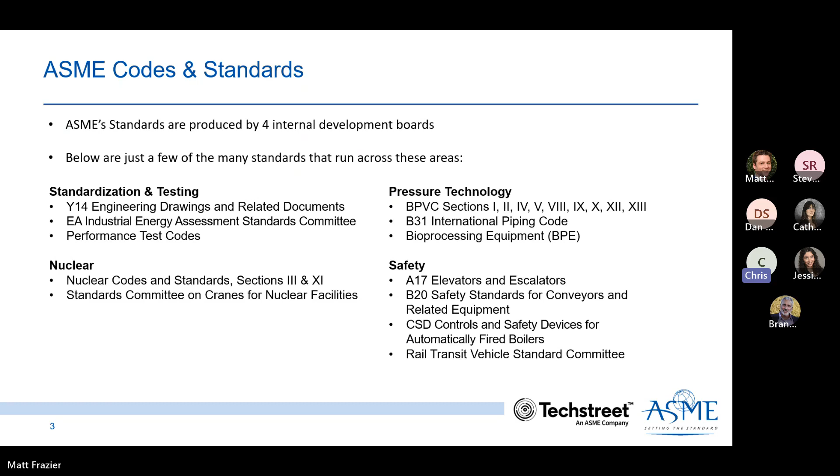Issued every 2 years, the Boiler and Pressure Vessel Code sets the standards for the safe design, manufacture, and maintenance of boilers and pressure vessels, power-producing machines, and nuclear power plant components. They also provide the latest information to maintain the ASME code symbol stamps. The next scheduled release of the Boiler Code is going to be July 2023. This edition is going to have 32 books with over 19,500 pages of material.

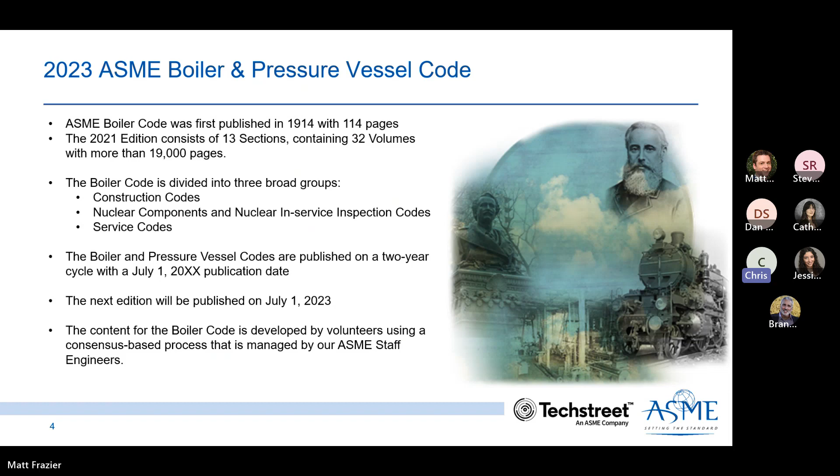The Boiler Code is a living document. It is constantly evolving. It is constantly providing essential rules and requirements for new materials, applications, and technologies, including material properties, as well as specifications for construction, safety rules and guidelines, proper care and maintenance requirements for pressure devices, as well as design and construction criteria across devices and components.

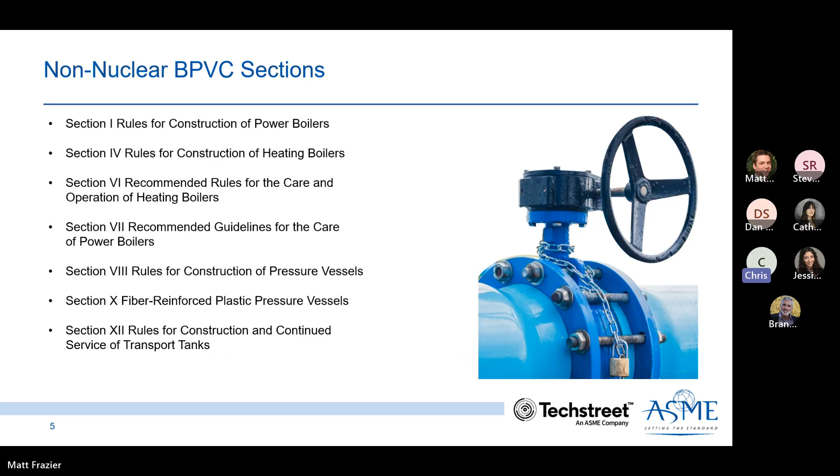Non-nuclear sections of the Boiler Code include construction of power and heating boilers, recommended guidelines and care for both, construction of pressure vessels, as well as working with reinforced plastic pressure vessels and transport tanks. The first part that we're going to cover is going to be the boiler sections.

For all types of power, electric, and miniature boilers, as well as high temperature water boilers, heat recovery steam generators, and specific fired pressure vessels to be used in stationary services, Section 1 specifies the construction requirements. It also covers power boilers used in locomotive, portable, and traction services. There are also guidelines for using the ASME certification marks. Those marks are going to be S, A, M, E, PP, and the PRT designator.

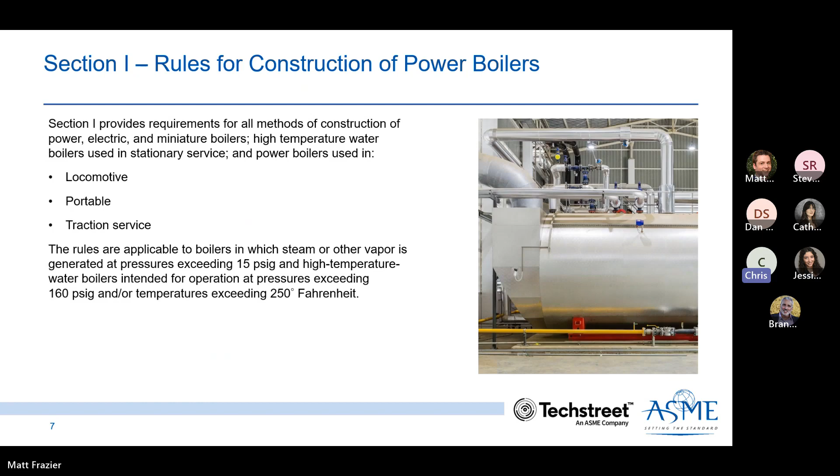Section 4 outlines the specifications for steam heating, hot water supply boilers, and potable water heaters intended for low pressure services that are directly fueled by gas, oil, electric, coal, or other solid or liquid fuels. These heaters must also meet standards for design, fabrication, installation, and inspection.

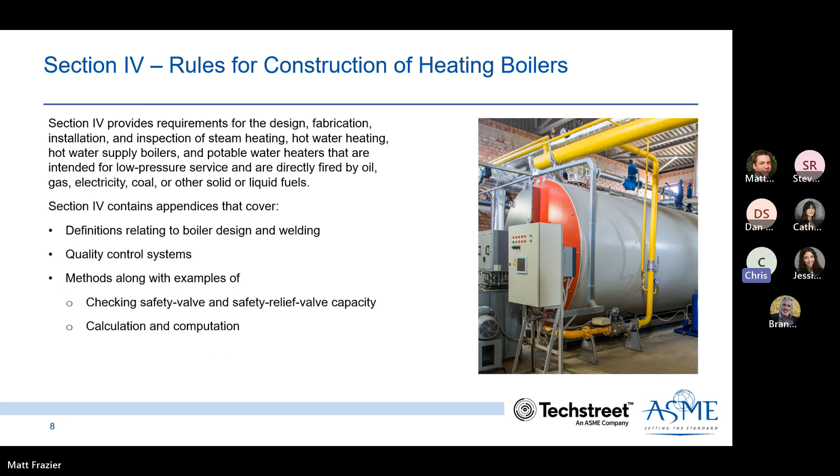It also includes appendices that define terms related to boiler design, welding, quality control systems, and methods of determining safety valve and safety relief valve capacities. Included in Section 4 are also going to be your guidelines for using H, HLW, and PRT product certification marks.

Section 6 covers the general descriptions, terminologies, and operation guidelines applicable to steel and cast iron boilers, limited to the operating ranges of Section 4 heating boilers. It includes guidelines for associated controls and automatic fuel burning equipment. Also included is a glossary of terms commonly associated with boilers, controls, and fuel burning equipment.

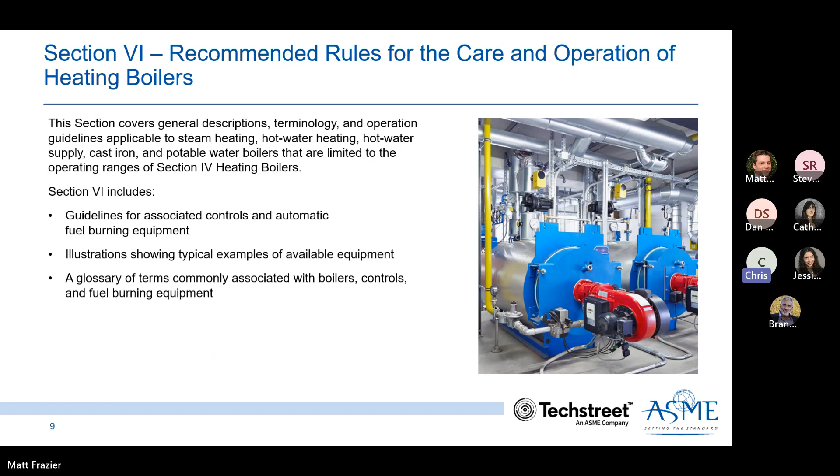Section 7 provides guidance and best practices for the use of power boilers in a safe manner. While locomotive and high temperature water boilers, nuclear power plant boilers, heating boilers, pressure vessels, and marine boilers are all excluded from the definition of a power boiler, it does cover stationary, portable, and traction type boilers. The instructions provided in Section 7 help individuals who are directly in charge of running, maintaining, and inspecting power boilers.

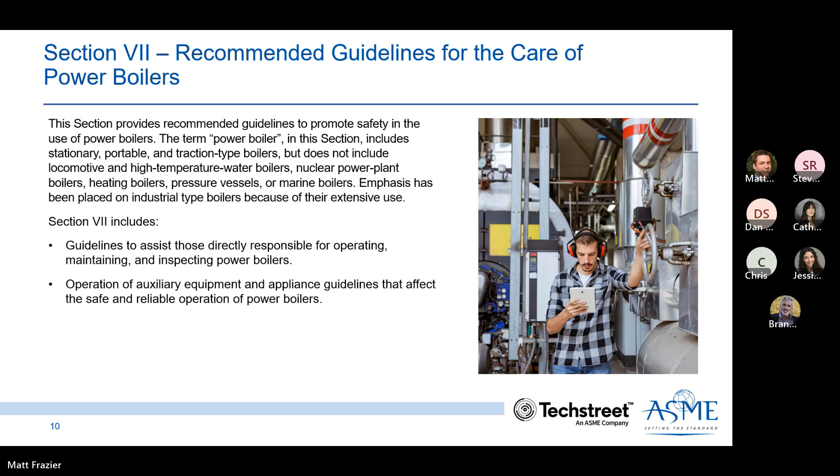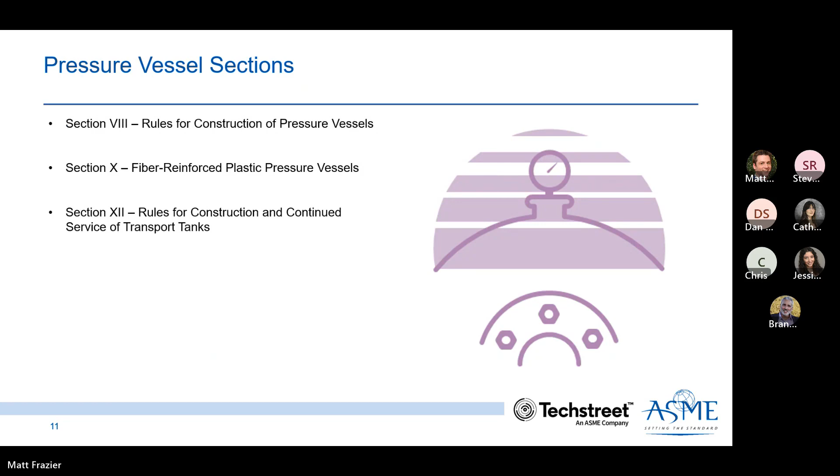The next non-nuclear section of the code is pressure vessels. Division 1 of Section 8 provides requirements applicable to the design, fabrication, inspection, testing, and certification of pressure vessels operating at either internal or external pressures exceeding 15 psi.

Specific requirements apply to several classes of material used in pressure vessel construction and to fabrication methods such as welding, forging, and brazing. It also contains mandatory and non-mandatory appendices detailing supplementary design criteria, non-destructive examination, and inspection acceptance criteria. Rules pertaining to the use of U, UM, and PRT certification marks are also included.

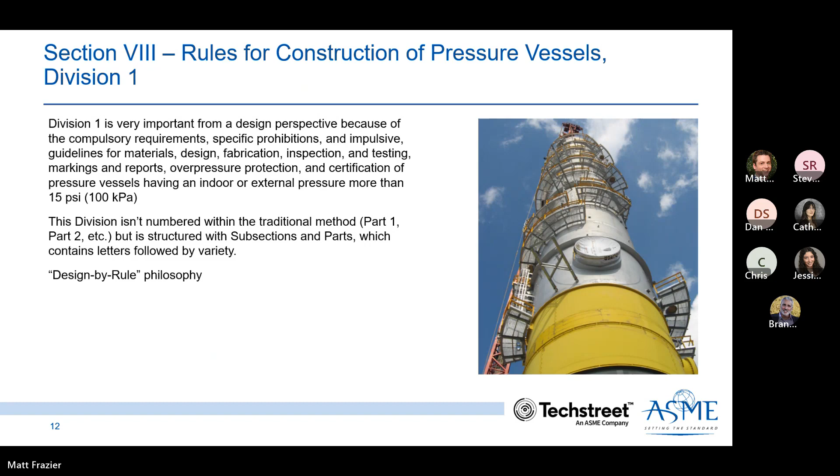Division 2 of Section 8 provides an alternative to minimum requirements for pressure vessels under Division 1 rules. In comparison to Division 1, Division 2 requirements on material, design, and non-destructive examination are more rigorous. Division 2 rules cover only vessels to be installed in a fixed location for a specific service, while operation and maintenance control is retained during the life of the vessel by the user who prepares the design and specification.

These rules may also apply to human occupancy pressure vessels typically found in the diving industry. Rules pertaining to the use of the U2 certification mark are included. There are specific differences between Division 1 and Division 2. Division 1 is concentrated on a design by rule approach, and Division 2 is design by analysis approach.

Division 1's design by rule approach is most utilized by engineers to size the pressure vessel according to the application's requirements. Division 1 is a much more conservative rule approach. The empirical relations and other mandatory and non-mandatory criteria often end up in an upscale pressure vessel design.

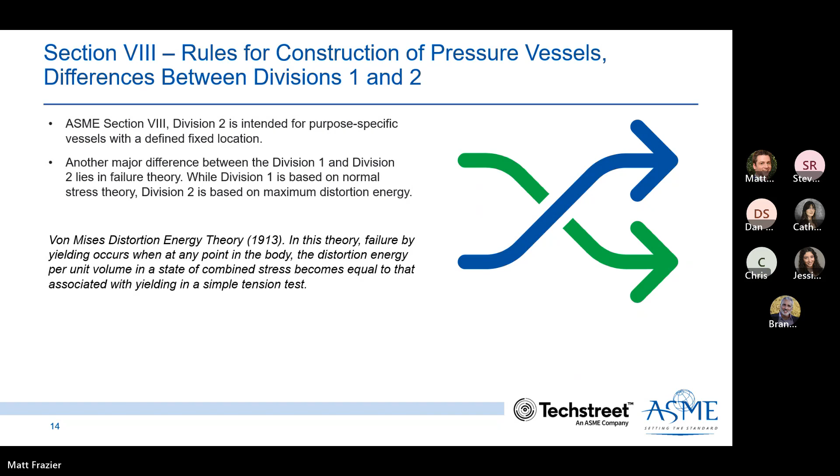Division 2, design by analysis approach, requires more detailed calculation than Division 1. Although this may increase the value of the pressure vessel design, it allows pressure vessels to face up to higher stresses. It's also meant for purpose-specific vessels with an defined fixed location. Another major difference between 1 and 2 lies in the failure theory. Division 1 is predicated on normal stress theory, and Division 2 is predicated on maximum distortion energy.

Division 3 of Section 8 provides rules for pressure vessels that operate at pressures exceeding 10,000 psi. Division 3 does not establish maximum pressure limits for either Section 8, Division 1 or 2, nor does it establish a minimum pressure limit for itself. Division 3 provides the rules that dictate the use of the ASME certification mark, the U3 designator.

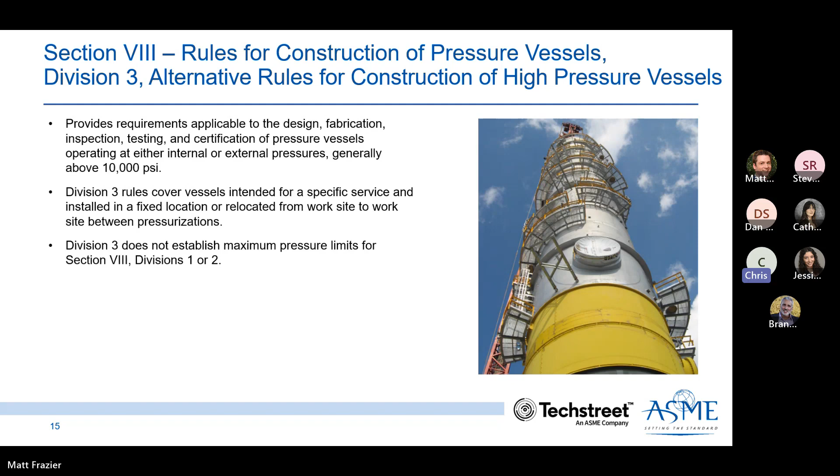Section 10 provides requirements for construction of an FRP pressure vessel in conformance with the manufacturer's design report. Section 10 covers requirements needed to produce, process, fabricate, examine, and test methods for the vessel. 3 classes of vessel designs are covered in this section. Classes 1 and 3 are qualified by destructive testing of a prototype, and Class 2 is subject to required design guidelines and acceptance testing using non-destructive techniques.

These vessels are not designed for lethal fluids. The only allowable techniques that can be used to fabricate vessels under Section 10 are bag molding, centrifugal casting, filament winding, and contact molding. There are also guidelines for using the RP certification mark.

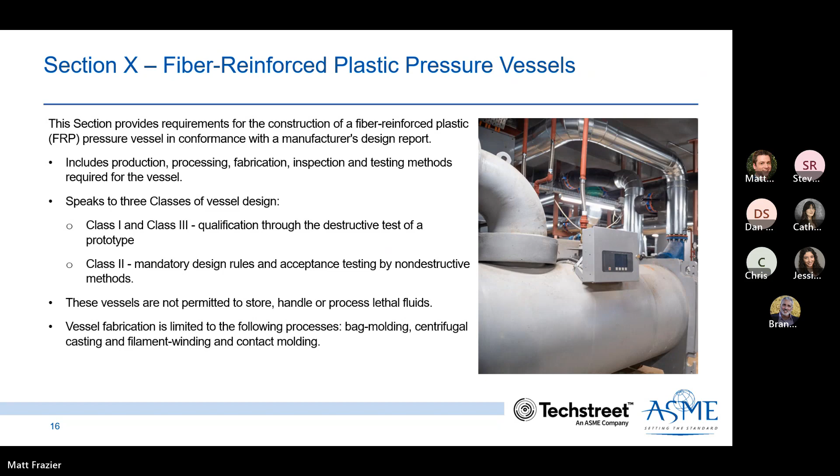The rules of Section 12 constitute requirements for construction and continued service of pressure vessels for transportation of dangerous goods. This can be via highway, rail, air, or water. Construction, material, design, fabrication, examination, inspection, testing, certification, and overpressure protection are also addressed.

Continued service is addressed, referring to inspection, testing, repair, alteration, and recertification of a transport tank that's already previously been in service. Included are also rules pertaining to the T and PRT certification product mark. The next sections we're covering are the nuclear sections, Section 3 and Section 11.

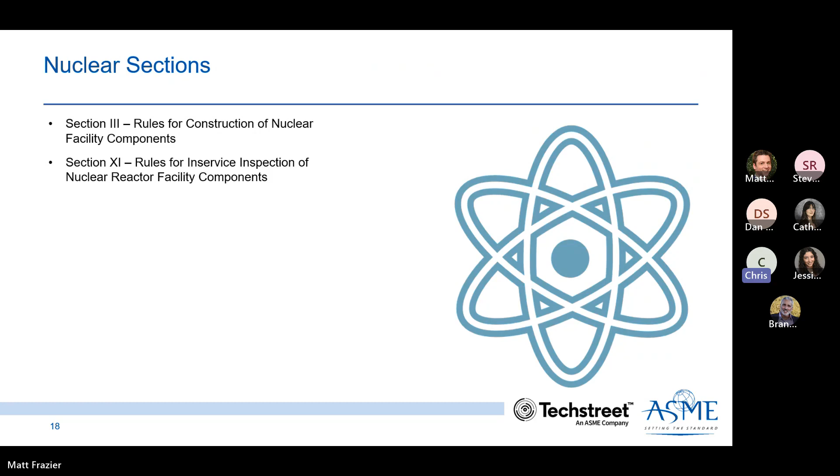Section 3 covers construction of nuclear facility components. The scope is intended to cover construction of components for all types of nuclear power plants. Division 1 covers your metallic vessels, heat exchangers, storage tanks, piping systems, pumps, valves, core support structures, supports, and similar items. It also provides rules for the low temperature light water reactors.

Division 2 contains requirements for material, design, construction, fabrication, testing, examination, and overpressure protection of concrete containment structures. These structures can be pre-stressed or reinforced. Division 3 contains requirements for the design and construction of containment systems for nuclear spent fuel.

Division 4 is fusion energy devices. This is currently a placeholder for future content. The upcoming Boiler Code 2023 will incorporate the components of FE1-2018 Rules for Construction of Fusion Energy Devices. And finally, Division 5, High Temperature Reactors, provides suitable rules for construction of gas and liquid cooled reactors.

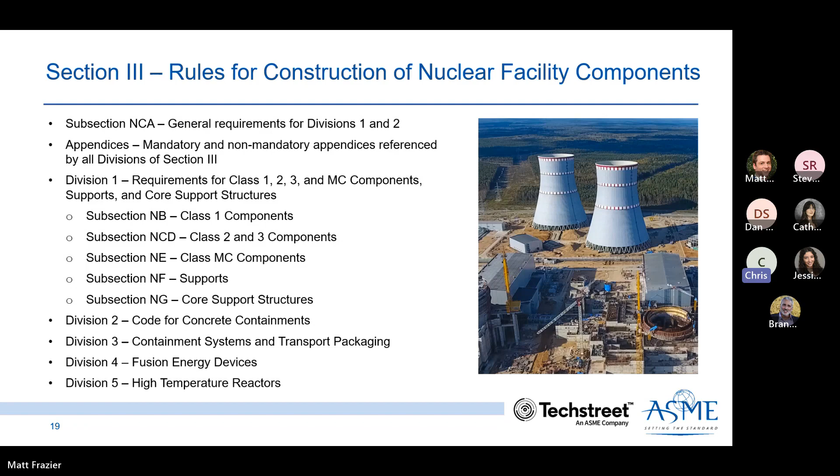Section 11 constitutes requirements to maintain the power plant while in operation and return the plant to service following plant outages, repair, or replacement activities. Division 1 is inspection and testing of components of light water cooled plants. And Division 2 is reliability integrity management. The first edition was published in 2019 and it includes a methodology to establish in-service inspection criteria independent of an SMR's technology. Division 2 is technology neutral and is applicable to all reactor designs.

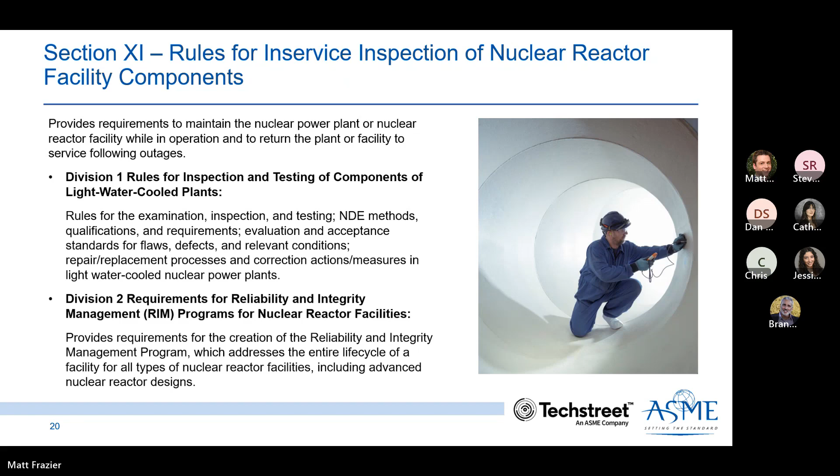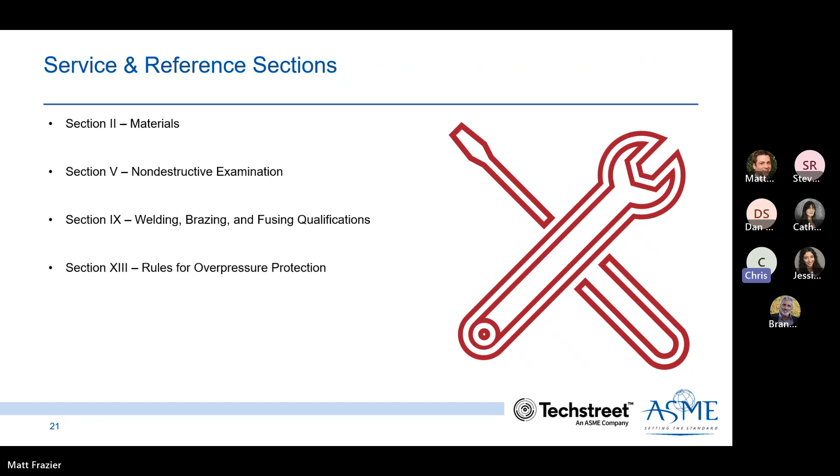The final section of the code are our service sections, and we'll cover them starting with Section 2. Starting with Section 2 of the service section, materials. Materials are broken into 4 parts. Part A is ferrous material. Part B is non-ferrous material specifications. Part C is specification for welding rods, electrodes, and filler metals. And we have Part D properties, which are customary or metric. It provides tables for the design stress values, tensile and yield stress values, as well as tables for material properties.

Moving on to Section 5 of the service section. Section 5 contains requirements and methods for non-destructive examination, which are referenced and required in other code sections. It also includes manufacturer's examination responsibility, duties of authorized inspectors, and requirements for qualification of personnel, inspection, and examination.

Section 9 contains the rules related to qualification of welding, brazing, and fusing procedures as required by other code sections for component manufacturers. It also covers rules related to the qualification and requalifications of welders, brazers, and welding, brazing, and fusing machine operators as required by other code sections.

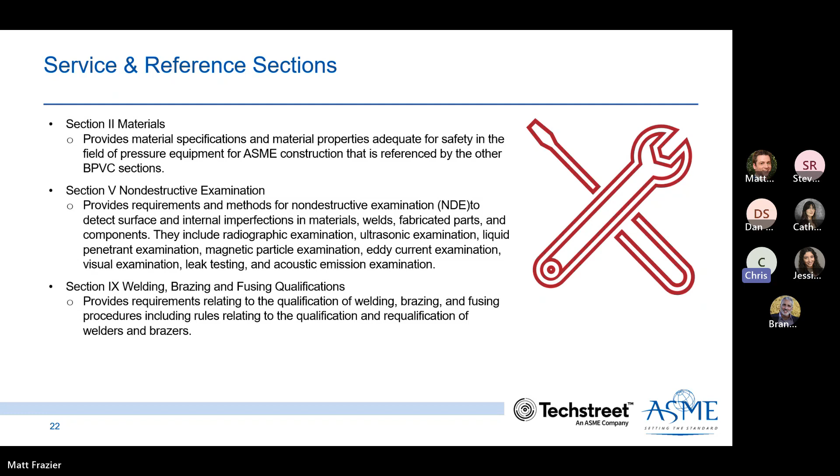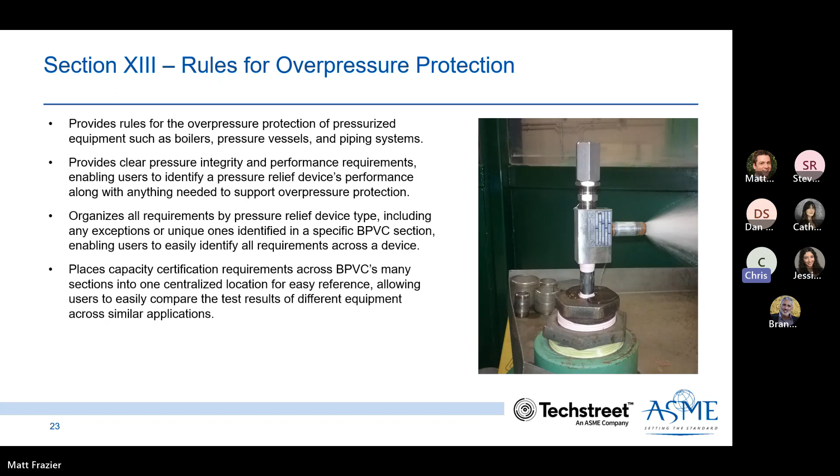And finally, Section 13. Section 13 was originally released in 2021. This is a newer section. It provides rules for overpressure protection, pressurized equipment such as boilers, pressure vessels, and piping systems. One of the main benefits of Section 13 is that it is organizing all requirements by pressure relief device types, including any exceptions or unique ones that are identified in a specific boiler code section, which enables users to easily identify all requirements across a device. In addition, Section 13 places capacity certification requirements across the code's many sections into one centralized location.

Errata to the boiler code may be posted on the ASME website to provide corrections to incorrectly published items or to correct typographical or grammatical errors in the boiler code. Erratas are announced through postings on the ASME website immediately after receiving approval from the respective code section committees. To gain access to the postings of these erratas through the boiler pressure vessel resource page, that can be found at www.asme.org. In addition, you can also subscribe to notifications for erratas for each and every ASME boiler pressure vessel code section.

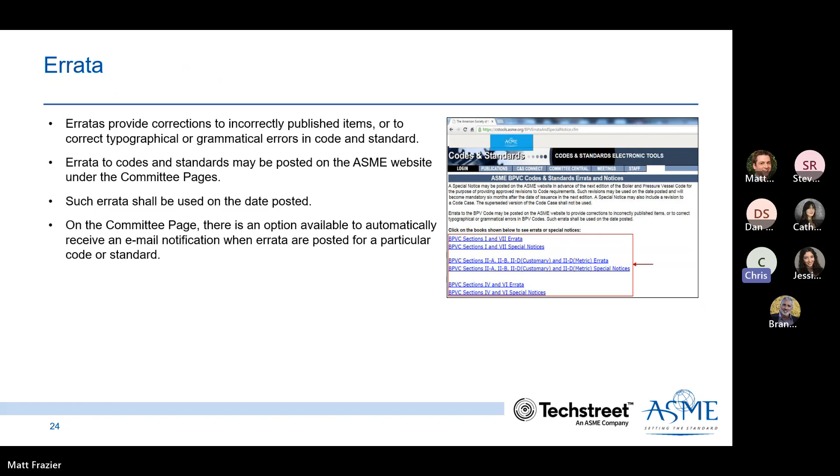In the event of an urgent need for alternate rules concerning materials, constructions, or in-service inspection activities not covered by existing boiler pressure vessel code rules, or the need for early implementation of an approved code revision, ASME may issue a code case. Code cases are effective immediately upon ASME approval. Code cases do not expire. Code cases are published in two categories. They're either published in boiler pressure vessel or nuclear. Purchases of either compilations of approved code cases include a subscription to the corresponding supplements contained in new and revised code cases issued during the associated 2-year edition cycle.

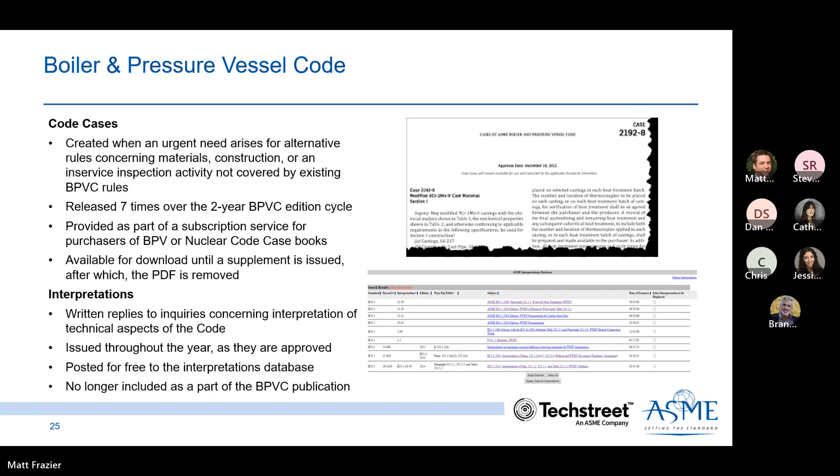For an organization to be recognized as ASME certified, your company is going to go through a rigorous process to ensure every operation is compliant with the code and performed to the highest standard. Typically, the time for a company to be certified from the time they submit an application to the time they receive certification is approximately 6 months.

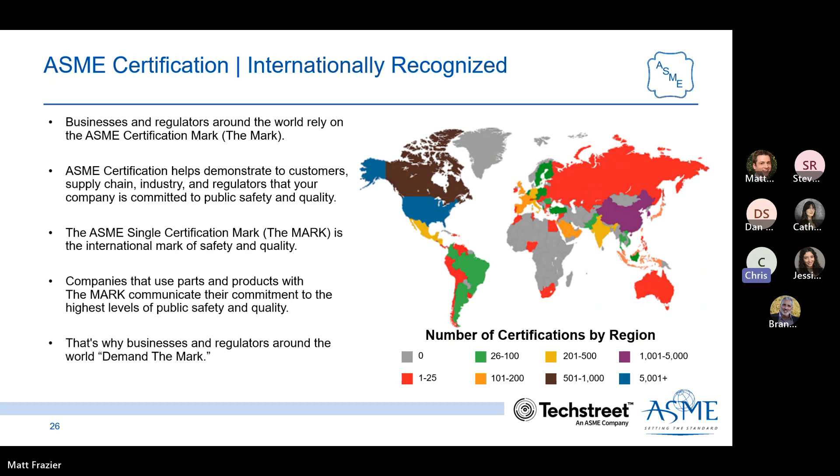The ASME certification mark covers nuclear and non-nuclear products and services which fall under the following categories. We have the boiler designators. We have 6 for power boilers under Section 1, 3 programs for heating boilers under Section 4. We have 5 certification programs for pressure vessels, 3 under Section 8, Division 1, 1 under Section 8, Division 2, and 1 under Section 8, Division 3.

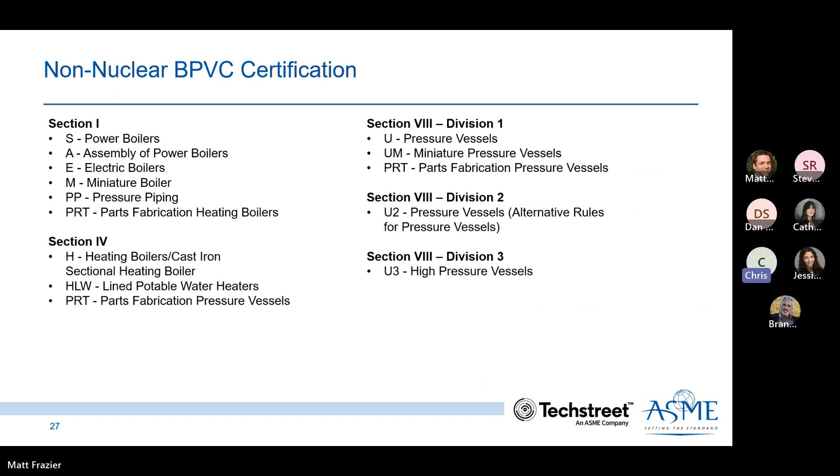Continuing with the non-nuclear boiler code certifications. We have 1 pressure vessel designator under Section 10, reinforced plastic vessels. For transport tanks, we have 2 designators under Section 12. And under our newest section, Section 13, there are 8 designators for certification.

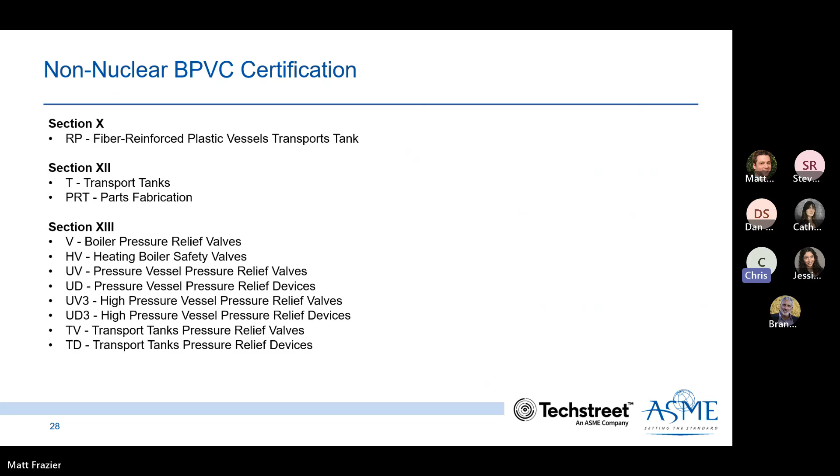ASME's nuclear certification programs consist of 6 different N-type designators, as well as an owner certification. N-type certificates of authorization issued by ASME signify that the certificate holder has been through a rigorous survey to verify the adequacy and the effective implementation of their quality program. If you do have an N stamp, it allows you to put that mark on the parts, components, and appurtenances used in nuclear facilities under Section 3 of the Boiler Code.

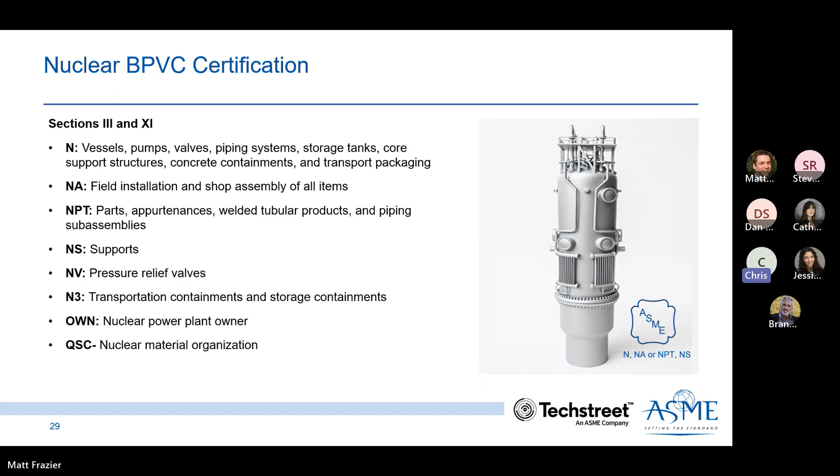One nuclear program that doesn't have a stamp is QSC, or the Nuclear Material Organization Certification Program. This program certifies organizations that are providing material to nuclear power plants in accordance with the requirements of Section 3, NCA 3800 and NCA 3900.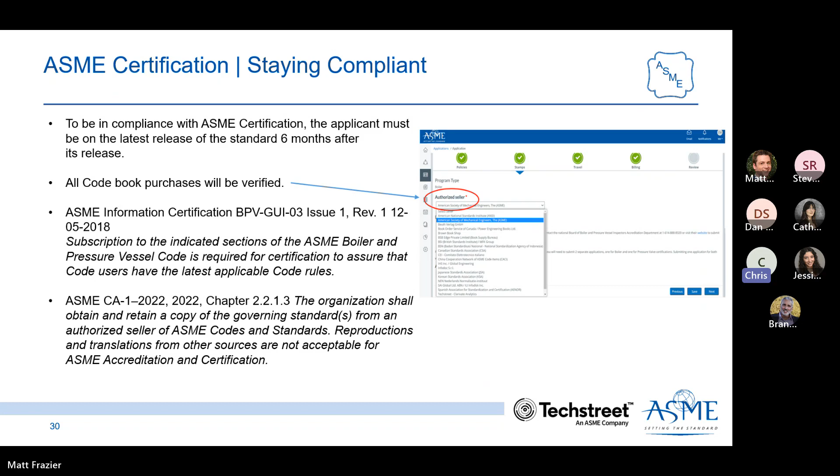It is a requirement for all ASME certificate holders to be on the latest edition of the Boiler and Pressure Vessel Code within 6 months of its release. That's why if you are carrying a code stamp, if the code comes out on July 1st, you must be in compliance by January 1st. All code books are verified that they have been purchased through an authorized reseller, such as Techstreet, and the organization is required to designate who they purchased their code book from during the application process when you are in CA Connect. This is just an example of the code books that would be necessary for an organization undergoing certification for a U or a UM certificate.

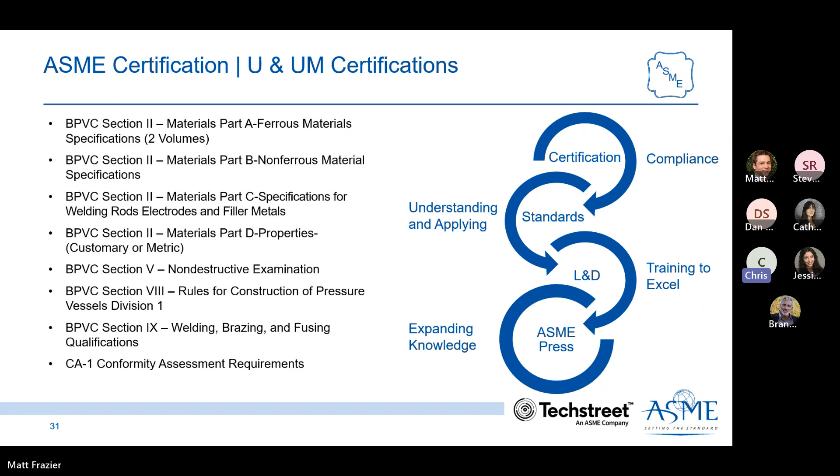And finally, we have a robust website. You can download all the information related to codes and standards and certification, as well as finding who your authorized resellers are and the books that you need for your certification program, or any related ancillary documents that are relevant to standards or your program.

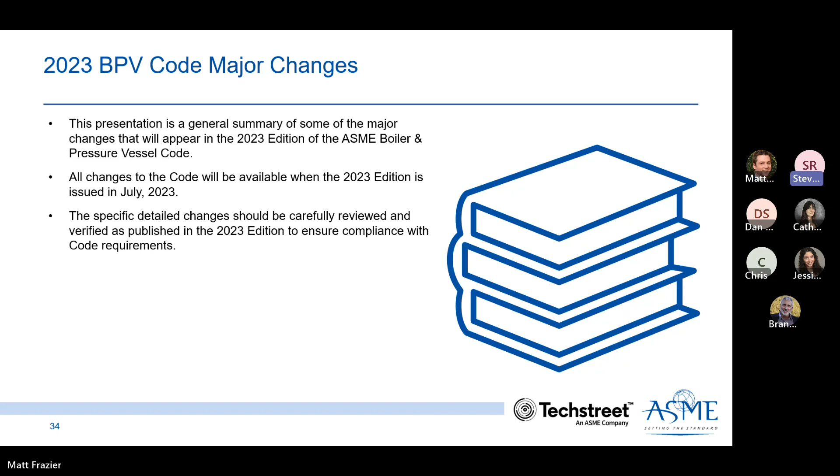For Section 1, Rules for Construction of Power Boilers, tables PG 67.5 and PG 67.5M have been expanded and revised for the supercritical capacity correction factors in determining the rated relieving capacity of pressure relief devices. PW 28.1.3 has been revised to permit simultaneous qualification of weld procedures by more than one organization. The Y factor table in PG 27.4.6 has been revised to make it consistent with Section 2D T notes.

PW 39.2 was revised to address the use of buttering welds without post-weld heat treatment of both materials. Form P-4 was revised to include a section for documenting boiler external piping under qualifying conditions. And tables PG 67.5, PG 67.5M, PG 68.7, and PG 68.7M have been relocated to an appendix to improve readability of overpressure protection requirements.

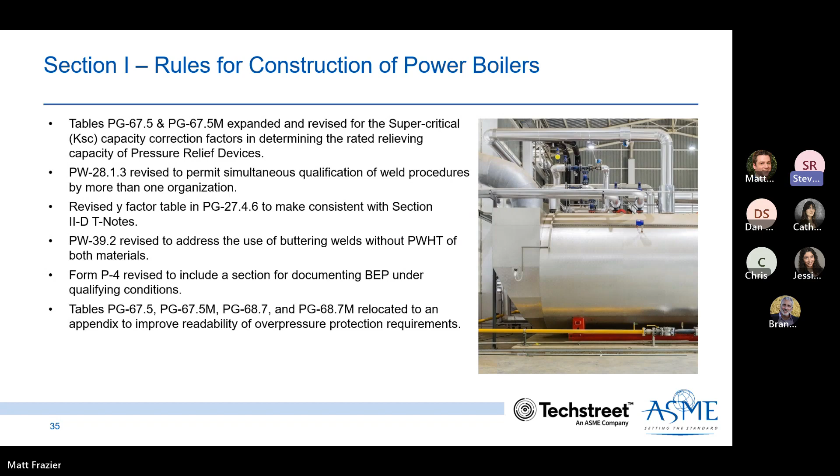For Section 2, Part A, updates to the latest adopted edition have been made to over 60 specifications. 2 new specifications have been added, SA 439 and SA 1058. And 2 specifications were removed, SA 557 and SA 731. A new statement of policy on the use of ASME material specifications has been added. Mandatory Appendix 2 has been retitled to the Framework of ASME Material Specifications and has been completely rewritten.

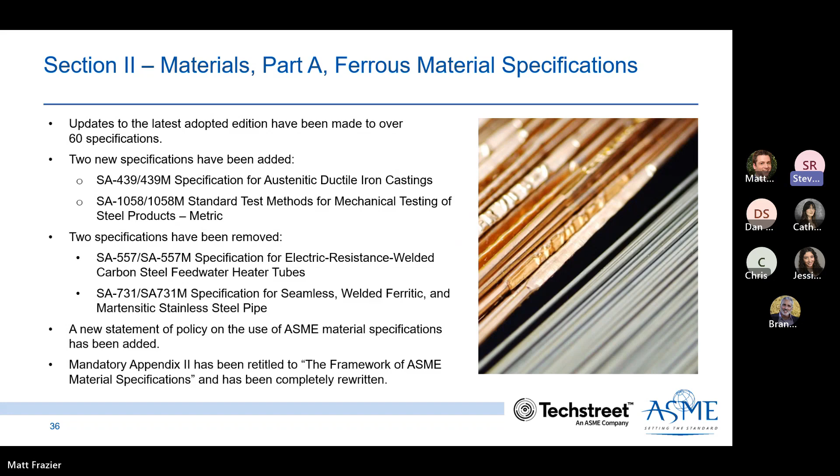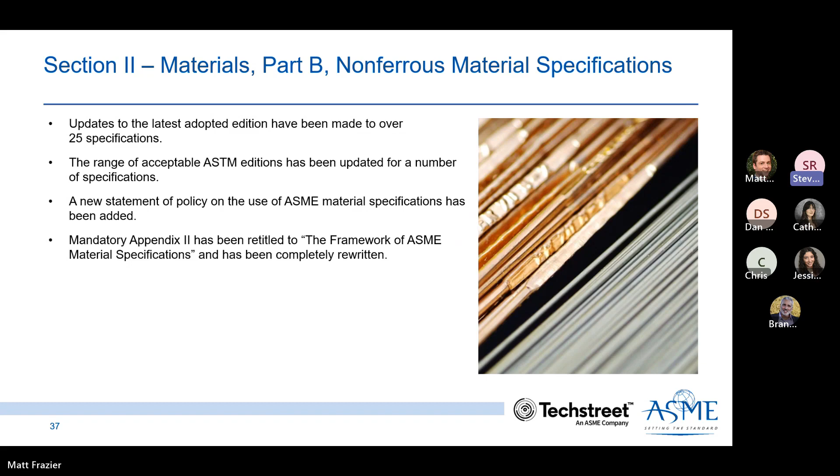Updates to the latest adopted edition have been made to over 25 specifications under Section 2, Part B. The range of acceptable ASTM editions has been updated for a number of specifications. A new statement of policy on the use of ASME material specifications has been added. Mandatory Appendix 2 has been retitled to the Framework of ASME Material Specifications and has been completely rewritten.

14 AWS specifications for arc welding electrodes, gas welding rods, and other filler metals have been adopted or updated into the 2023 edition of Section 2, Part C.

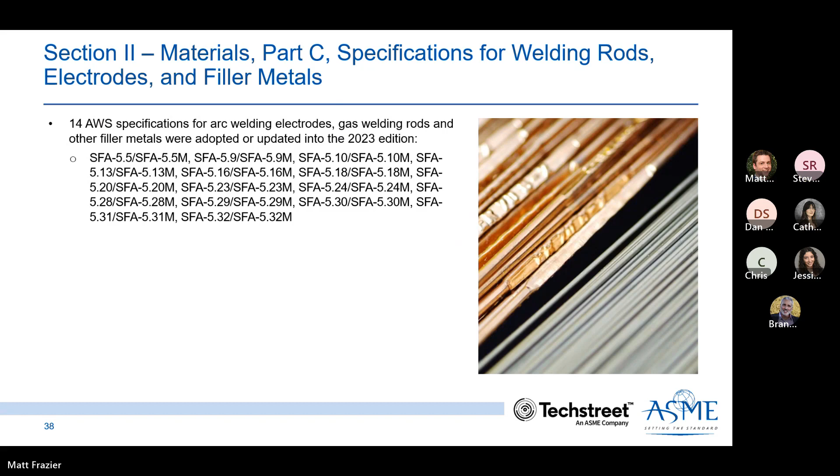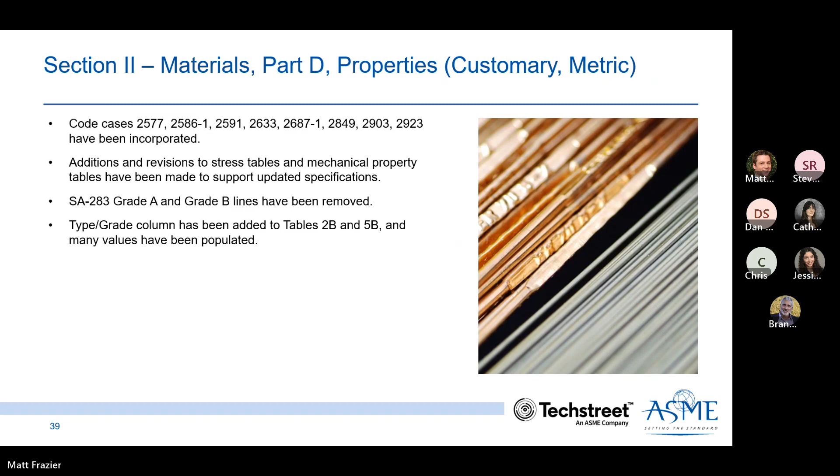Starting with subsection NCA of Section 3, NCA 3000 and 5000 have been updated to permit the use of newly published Section 11, Division 2, reliability and integrity management programs as a basis for designing for in-service monitoring and non-destructive examination. Table NCA 7100-2 has been updated to align with the revisions made to Table NCA 7100-1. Updates to the table include the identification of other acceptable editions and applicable subsections for listed reference standards.

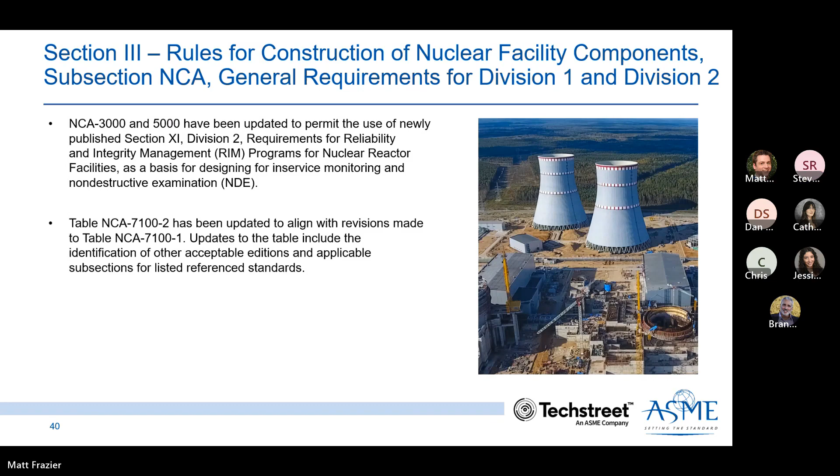In the Section 3 Appendices book, mandatory appendices 11, 12, and L have been revised to extend the applicability to Section 3, Division 5, subsection HC, subpart B.

Mandatory Appendix 13-1223 has been revised and updated to address the International Engineering Alliance and the European Federation of National Engineering Associations concerning the certifying engineer.

Mandatory Appendix 28 was developed to allow for the usage of powdered metal hot isostatic pressing advanced manufacturing for the production of items made from 316L SS as one process method.

Non-mandatory Appendix G-2223 has been revised to clarify toughness requirements for nozzles and to provide methods that may be used for external loads, thermal loads, and internal pressure as currently addressed.

And Mandatory Appendix 26 has been revised and updated to include sidewall fusion, fittings, volumetric examination, and code case N-891.

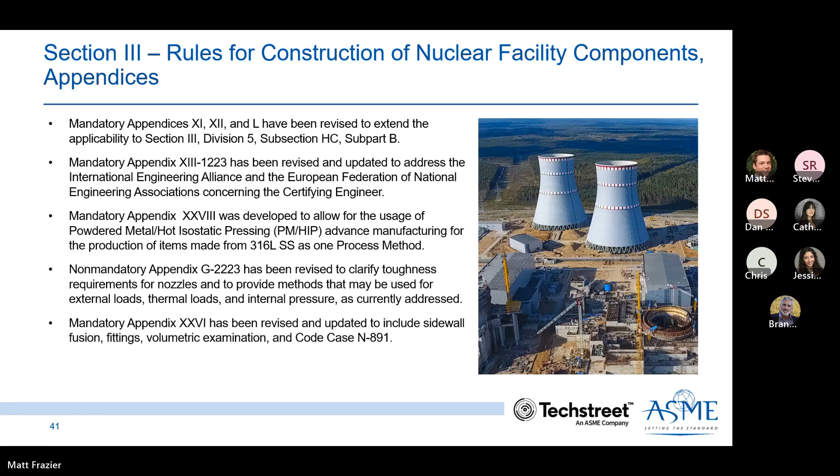In subsection NB, Class 1 components, NB-2121A has been revised to permit the use of advanced manufacturing. This revision is to permit the use of advanced manufacturing product forms not included in Section 2, Part D, Subpart 1, Tables 2A, 2B, or Article NB-2000, provided that the product form meets the requirements of Mandatory Appendix 28.

NB-2321.2 has been revised to remove the requirements to use full-size test specimens, and test specimen requirements were adjusted to be in accordance with SA 370.

NB 5000 has been updated to permit the use of the newly published Section 11, Division 2 Reliability and Integrity Management Programs as a basis for designing for in-service monitoring and non-destructive examination.

And NB 5540 has been developed to permit the use of CP 189 as an acceptable NDE personnel qualification standard.

In subsection NCD, Class 2 and Class 3 components, NCD 2121A has been revised to permit the use of advanced manufacturing. This revision is to permit the use of advanced manufacturing product forms not included in Section 2, Part D, Subpart 1, Tables 2A or 2B, or Article NCD 2000, provided the product form meets the requirements of Mandatory Appendix 28.

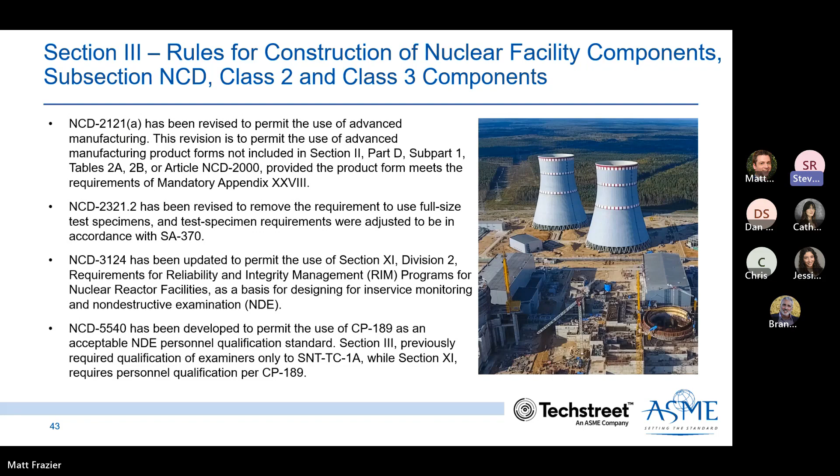In subsection NE, Class MC components, NE 2321.2 has been revised to remove the requirement to use full-size test specimens, and test specimen requirements were adjusted to be in accordance with SA 370.

NE 3125 has been updated to permit the use of Section 11, Division 2 as a basis for designing for in-service monitoring and non-destructive examination.

NE 5540 has been developed to permit the use of CP 189 as an acceptable NDE personnel qualification standard.

In subsection NF, supports NF 1000, NF 2000, NF 3000, Table NFD, and Appendix NFE have been revised for the addition of requirements for energy absorbers. Energy absorbing devices have not been fully defined prior to the noted revision.

NF 2321.2 has been revised to remove requirements to use full-size test specimens, and test specimen requirements were adjusted to be in accordance with SA 370.

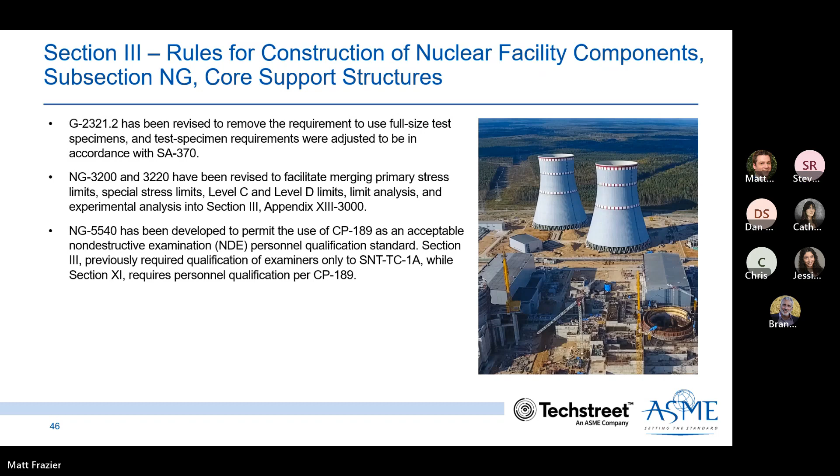NG 3200 and 3220 have been revised to facilitate merging primary stress limits, special stress limits, level C and level D limits, limit analysis, and experimental analysis into Section 3, Appendix 13-3000. And NG 5540 has been developed to permit the use of CP189 as an acceptable non-destructive examination personnel qualification standard.

And NG 5540 has been developed to permit the use of CP189 as an acceptable non-destructive examination personnel qualification standard.

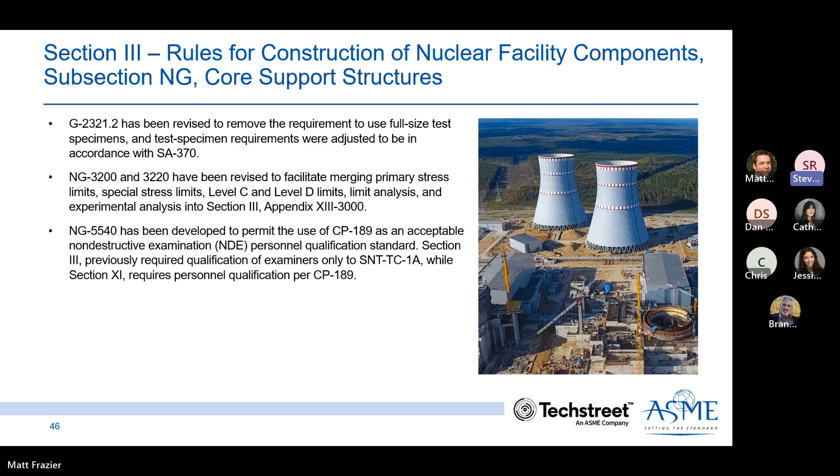In Section 3, Division 2, CC-2331.2, CC 3532.1.7, and Table CC 4333-1 and Table D2-8-1410-1's requirements related to ASTM A615-20 have been updated to align with the current material requirements and grade options listed in the most current ASTM standard.

CC-2466.2 now includes a note to clarify what constitutes a change in heat treatment conditions when pre-stressing elements materials.

And CC 2522.1.2 has been revised to remove requirements to use full-size test specimens, and test specimen requirements were adjusted to be in accordance with SA 370.

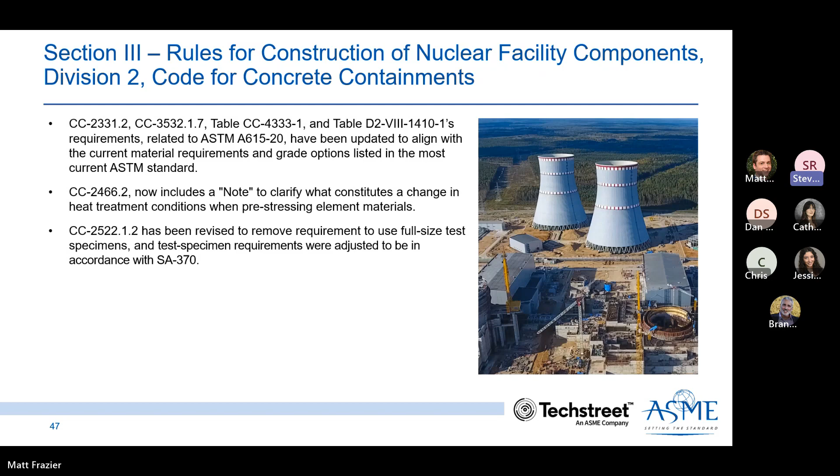Section 3, Division 3, WB-2321.2, WC-2321.2, WD-2321.2 have been revised to remove requirements to use full-size test specimens, and test specimen requirements were adjusted to be in accordance with SA 370.

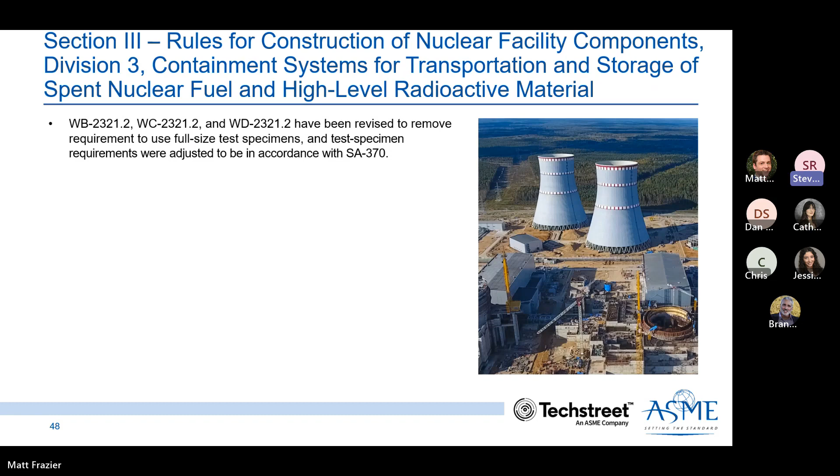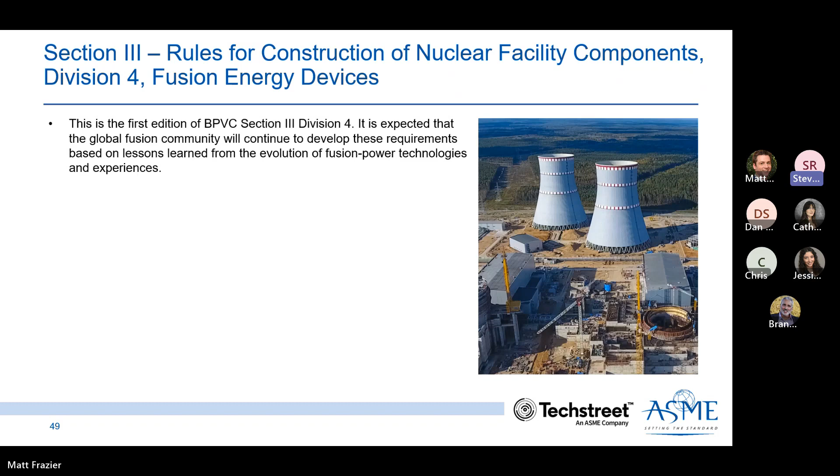In Section 3, Division 5, Table HBB 3225-4 was revised to extend the thermal aging factor for Class A grade 91 components from 300,000 to 500,000 hours.

Mandatory Appendix HBB I-14 tables were revised to extend stress rupture factor values for grade 91 from 300,000 to 500,000 hours.

HBB T-1800 was revised to extend isochronous stress strain curves for grade 91 components from 300,000 to 500,000.

HHA 3142 and HHB 3142 have been revised to remove damage dose unit and only use displacements per atom damage dose unit.

Non-mandatory appendix HBBZ was added to provide guidance on constructing a suitable inelastic model from data and to offer designers an acceptable reference model for grade 91.

And non-mandatory appendices HHBD and HHBE have been developed to cover carbon-carbon ceramic matrix composites.

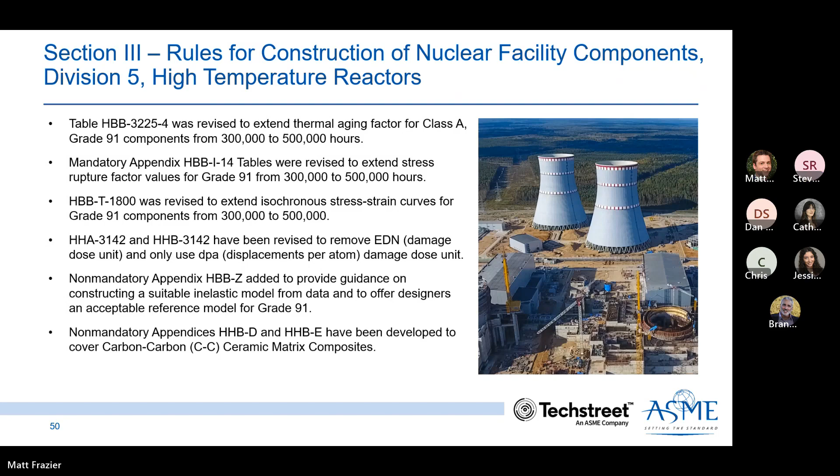For Section 4, HG 715, HG 803, HLW 810, HLW 902, HLW 903, HLW 904, and HLW 906 were revised to support the proposed drain valve language in HG 803.2C3 and HG 803.3C2, in order to align with the requirements in code cases 2873 and 2983 so that it can be incorporated into the Section 4 code.

Table 2-100 now references the latest edition, the CA-1 standard for conformity assessment requirements. And a provision was added to HLW 602 and HG 531 for the removal of a nameplate or marking of a part, when incorporating the part into a boiler that is to be certified.

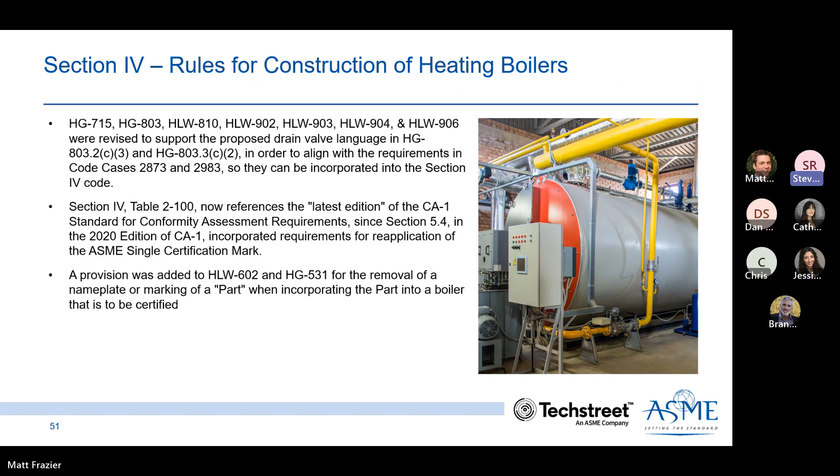In Section 5, Article 1, T-120E has been modified to include exceptions made to SNT-TC-1A and CP-189. This eliminated the need for mandatory appendices 3 and 4, which were removed.

A new mandatory appendix for Article 12 was added on the evaluation of the sensitivity of an acoustic emission instrumentation. Requirements have been added for the use of the time of flight diffraction without the supplemental scan of near surface.

Article 9, paragraph T953, remote visual, has been revised to accommodate deployment mechanisms like unmanned aircraft vehicles and systems, and adopted 19 updated ASTM specification documents.

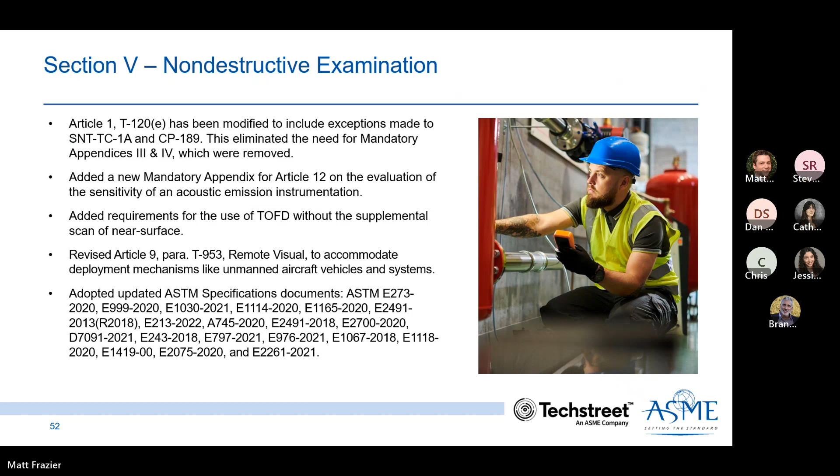In Section 6, the definition of relief valve was added to Article 2, so it's consistent with Section 13. Clauses were added to paragraph 6.4, pressure relief discharge piping, to align with similar changes made to Section 4, paragraph HG 716.6, along with the creation of Section 13, Section 12.8.

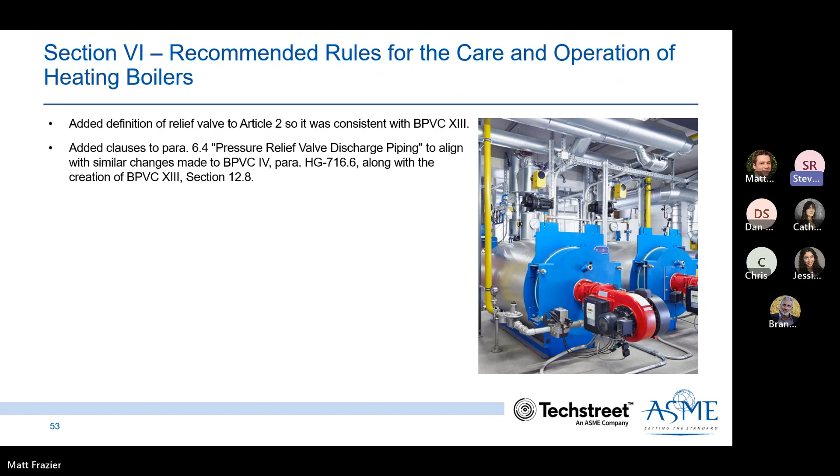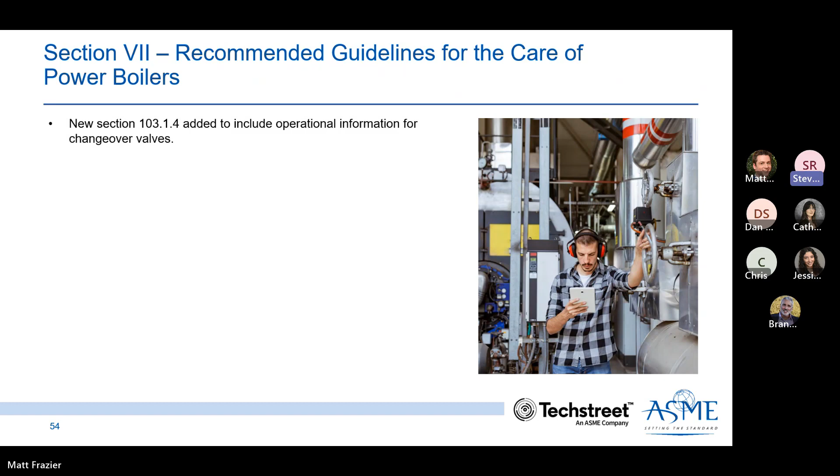In Section 7, a new Section 103.1.4 was added to include operational information for changeover valves.

In Section 8, Division 1, a new paragraph, UG 84D3, was added to clarify the impact test requirements for diffusion welding. Paragraph UG 101A5 was added to address sharing of proof testing reports between manufacturers owned by the same entity.

Part UHX has been realigned and revised for consistency between the heat exchanger types. The shell and channel coefficients have been revised to be based on the mean diameter instead of the inside diameter, which is consistent with PTB-7. The Part UHX and Appendix 26 design rules, which are identical to Part 4.18 and 4.19, Division 2, have been removed and point to Part 4.18 and 4.19 when appropriate. This will enable identical requirements for all heat exchangers, resulting in easier maintenance through one set of rules.

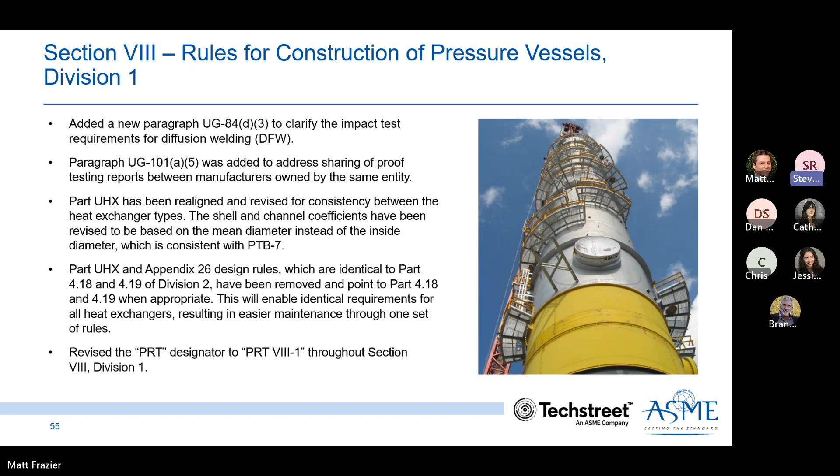The PRT designator was revised to PRT 8-1 throughout Section 8, Division 1.

For Section 8, Division 2, Part 2 has been revised to remove certifying engineers for Class 2 design by rules applications. This action will eliminate conflicts with international engineering registration requirements for the majority of applications.

Part 4.18 has been realigned and revised for consistency between the heat exchanger types. Paragraph 4.2.5.7, Category F Locations, has been added in order to assign a common joint category to tube-to-tubesheet welds.

Paragraph 5.4, Protection against failure from buckling, has been completely rewritten, and a new table of load cases, Table 5.8, has been added.

Paragraph 5.5.2.4 and Table 5.10 have been revised and now provide a quick and simple method to screen components in cyclic service, eliminating the need for a full fatigue analysis. The PRT designator was also revised to PRT 8-1 throughout Section 8, Division 2.

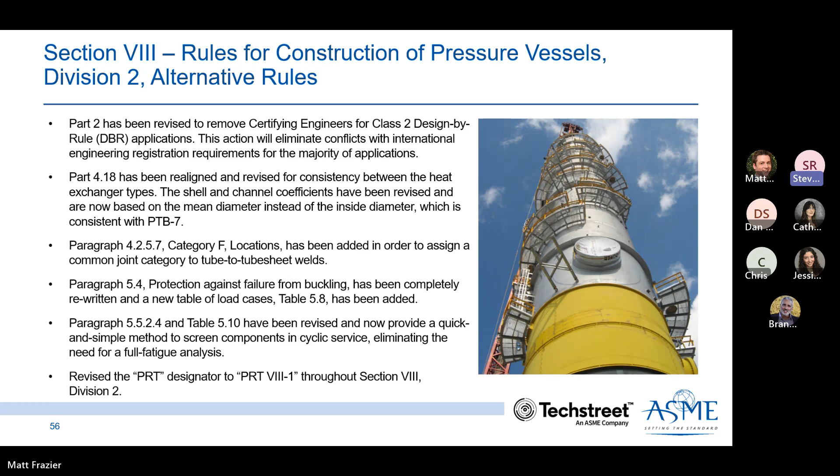In Section 8, Division 3, KD 430, the minimum Delta Kth for the calculation of crack growth rates now includes carbon and low alloy steels with SY less than or equal to 90 KSI.

KD 322 provides additional clarity on the logarithmic interpolation between tabular values for individual design curves in figures KD 320.1, KD 320.1M, KD 320.2, and KD 320.2M. This new addition allows for a linear interpolation for an intermediate ultimate tensile strength.

KM 270 now includes the notch tensile strength test along with the calculation of the notch strength ratio.

KM 234.1b has been revised to lower the minimum design metal temperature for all materials that are not fully austenitic stainless steels. KG 310, KG 311, and KG 323, along with KD 740, are revised to support manufacturers seeking to use a single user's design specification for the production of vessel designs intended for use across multiple jurisdictions.

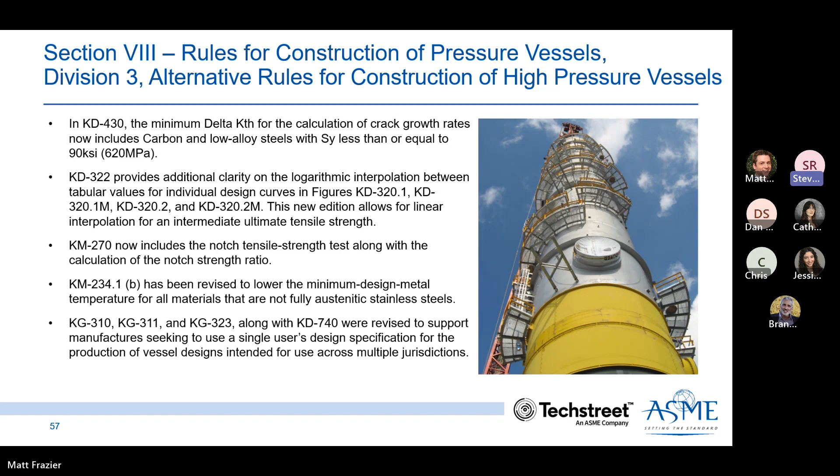In Section 9, QG-108 has been revised to remove the 1962 provision and clarify the status of old PQRs when writing a WPS to a later edition.

The definition of initial heating interfacial pressure was added to QG-109.2, and previous omissions of sidewall fusing was added to pertinent definitions within QG-109.2.

Table QW 264 has a new requirement that includes carbon equivalent limits for applicable steel alloys when laser welding is performed, in order to address the increased risk of any cracks occurring.

A new paragraph in QW 403 also includes the new variable for a change in base metals.

Table QW/QB-422 has been revised to include weld metals based on SFA classification: SFA 5.9, SFA 5.18, and SFA 5.28.

A non-mandatory Appendix L has been revised to further clarify the qualification requirements for welders and welding operators.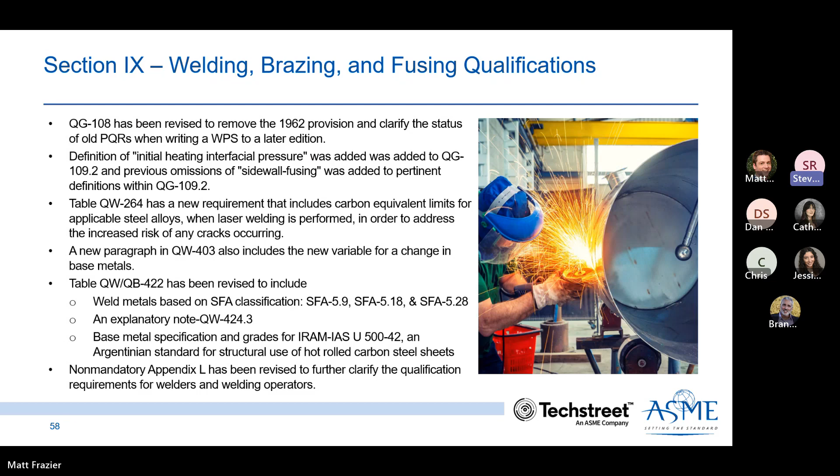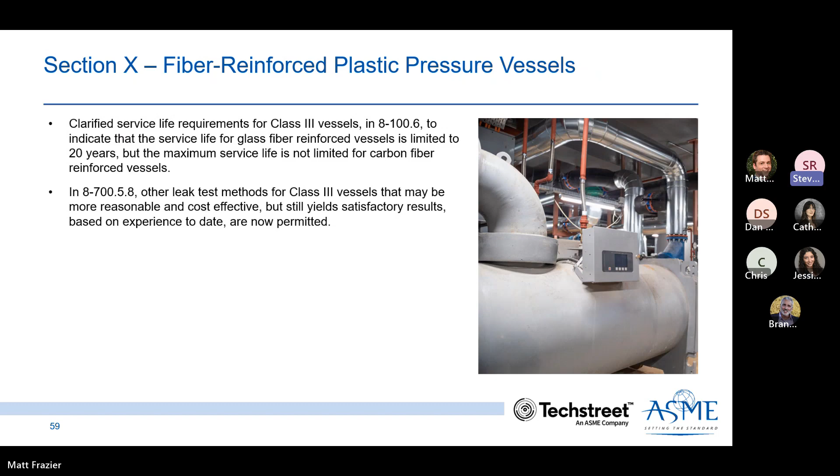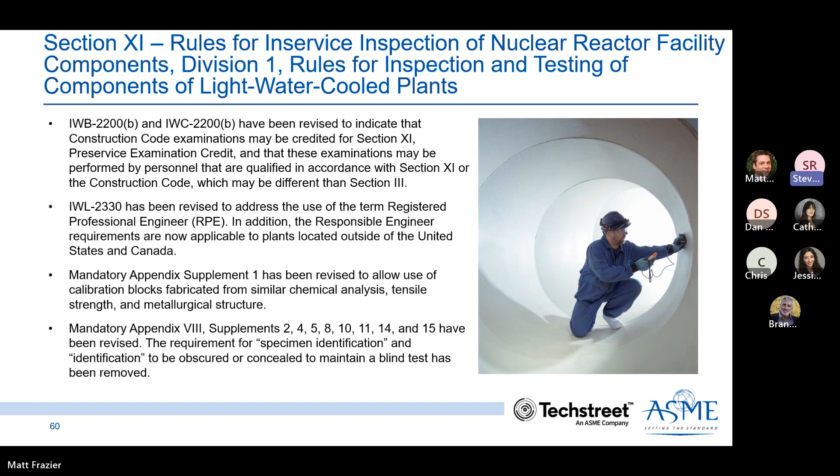Mandatory Appendix 8, Supplements 2, 4, 5, 8, 10, 11, 14, and 15 have been revised. The requirement for specimen identification to be obscured or concealed to maintain a blind test has been removed.

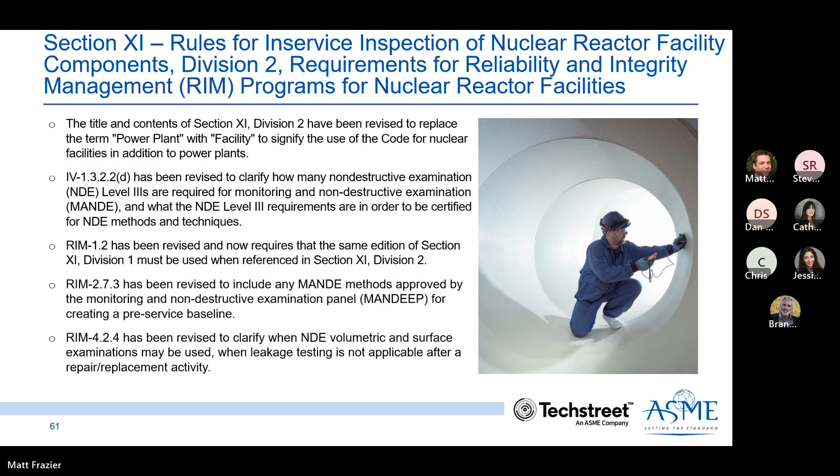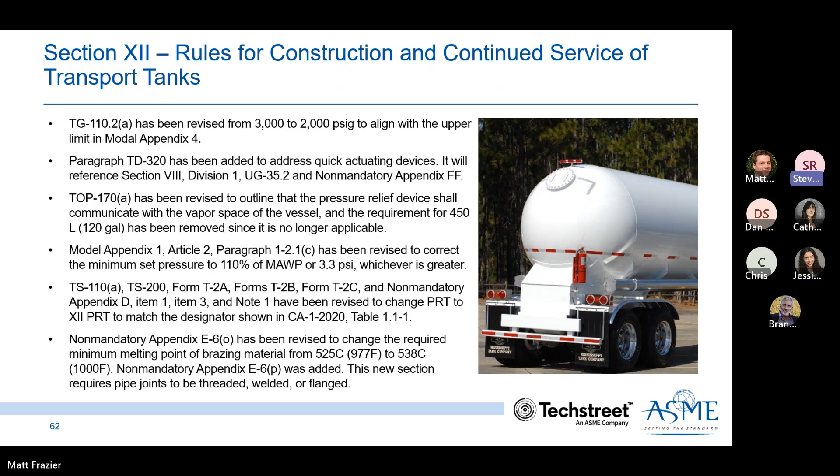Non-mandatory appendix E-6(o) has been revised to change the required minimum melting point of brazing material from 525 degrees Celsius to 538 degrees Celsius. And non-mandatory appendix E6P was added; this new section requires pipe joints to be threaded, welded, or flanged.